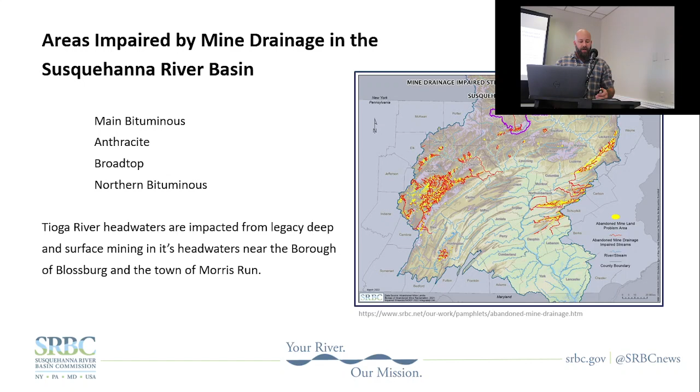It's tough, I gotta push over on this one, down on this one, that's confusing.

So coal was first discovered in Blossburg in 1792 and first mined in 1806. At the peak of production in 1880, Tioga was producing over 1 million tons of coal a year. Coal was mined in Blossburg and Morris Run until the mid-1980s.

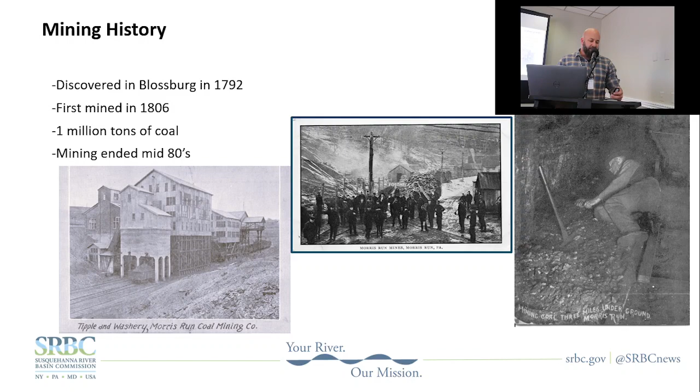So here's the problem. You have 6 discharges that are the main impact of the Tioga River. Those discharges, you have a discharge on Bear Creek, discharge on Coal Creek, 3 discharges on Morris Run, and a discharge on Fallbrook. All these discharges enter the Tioga River within 5 miles of each other.

They pack such a punch that downstream 20 miles, the Tioga River is impacted, is listed as impaired by AMD. That goes all the way up to the Tioga Reservoir, and that impairment would continue for a longer reach, but it's mitigated by the Hammond Reservoir, which we'll talk about later.

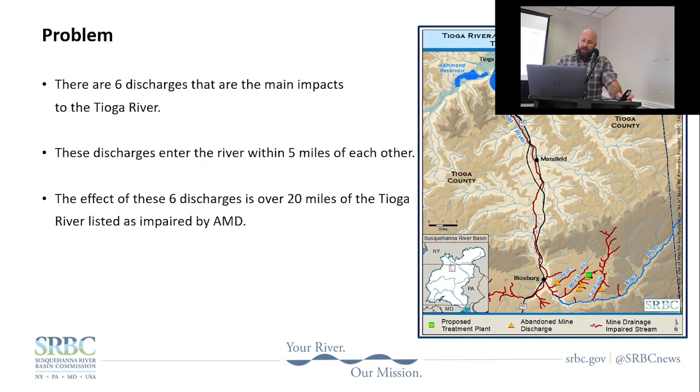So getting into the problems. First one is located on Coal Creek. The discharge is named DCC-05. All the water that you can see in that picture is out of the mine. Kind of looks pretty to look at, but it's awful.

My old partner described, she'd say, that's a lot of shit water. Now, my boss asked me not to swear, so I just said this is pretty nasty water. But it's... I heard you. And I never said shit. I never said shit. Yeah, see, Tom never said shit.

I didn't either. So you're looking at an average flow of 2.4 million gallons a day of water with the pH in the high 2s. It's really nasty stuff. You're talking about 900 tons a year of acidity, 100 tons a year of iron, and 100 tons a year of aluminum.

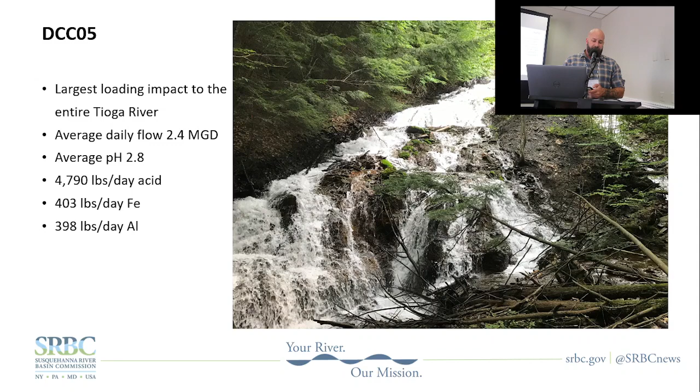DCC-05 is a free draining mine. Means there's no mine pool behind it. You can manually manipulate to allow for the ease of collection and then further on treatment. Highest flows that have been measured out of DCC-05, by the way, it gets up to 11 million gallons a day.

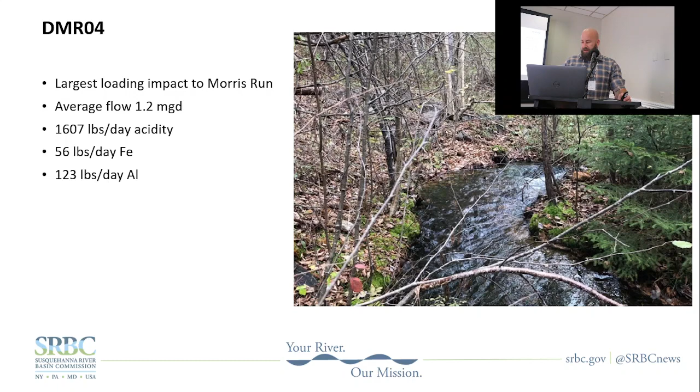Moving on through the watershed, we have DMR-04. The entryway of DMR-04 was reclaimed over, so it now emerges as an artesian discharge. DMR-04 is the largest impact on Morris Run. You can see the loadings up on the screen there. Also on Morris Run, you have DMR-03. This is the second largest impact to Morris Run.

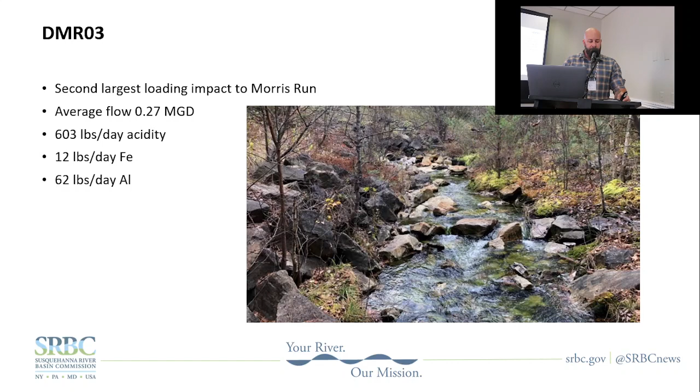All the discharges on Morris Run, real similar water quality. pH in the low to mid 3s, conductivity averages 1100 to 1600. Just like DCC-05, all the discharges on Morris Run are free draining. So again, there's no mine pool behind them to play with. Last one on Morris Run, third largest impact is DMR-01. This is the collapsed entryway right there. And this again has an artesian flow.

DFB-99 is a discharge that impacts the tributary of Fallbrook. It's currently partially treated by a passive treatment system.

Shit, sorry, I didn't say shit.

This is the overhead. There's 3 treatment cells and 2 settling ponds. Due to equipment failure at the collection point, the system now receives more water than it was meant to handle. It was originally only meant to handle 800 gallons a minute. It now receives the brunt of the discharge, and it's more than the system can effectively treat.

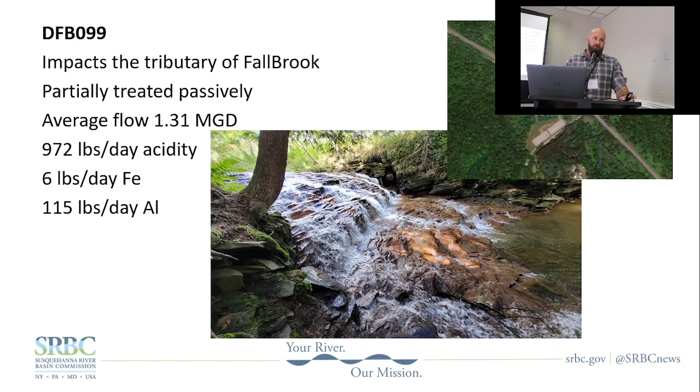So what Tom's going to talk to you about is we're going to take all these discharges and pipe them to a central active treatment plant. This is a look at what the average influent into the plant is going to be. On average, it'll treat a little over 5 million gallons a day.

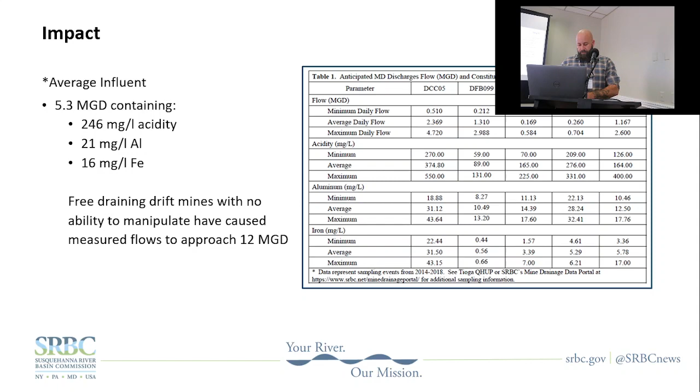Just a little quick story. I always tell a story that others I present with, some of you may know Dr. William Kimmel. That was my graduate professor in California. And Dr. Kimmel always said you at least swore once in every presentation because it keeps everyone awake. And I think we swore about 5 or 6 times already, so we're well ahead of the ballgame.

Thanks, King, by the way, and we're gonna talk about some of the design solutions. I'm gonna preface this talk by reminding everyone that I am a biologist by trade, so I'm gonna talk design work as a biologist, so we'll see how this goes. Just give you a timeline, where we were, where we are now, where we're gonna be in the near future. This project was funded to SRBC in 2021. I do believe Kleinfelder won the proposal in the first quarter of 22.

As you can see, we didn't have a conceptual done until October of 2022, and that's because there were a lot of questions that needed to be answered in terms of if there were mine pools that we can manipulate there. So a lot of borehole happenings in that summer of 2022, helped along by BAMR and Artie Crossman. And what we found out, and what I'm gonna talk about, is there's really no mine pools there to help us. So we have to, as King said, deal with the flow as it's given to us.

Preliminary design, 30%, was completed December 2022. We just came out of the pre-final design, 60%. So we just opened up, getting to the 90% design. We estimate final design first quarter of 2024. And then second quarter 2024, hopefully getting this out on the street and construction bid.

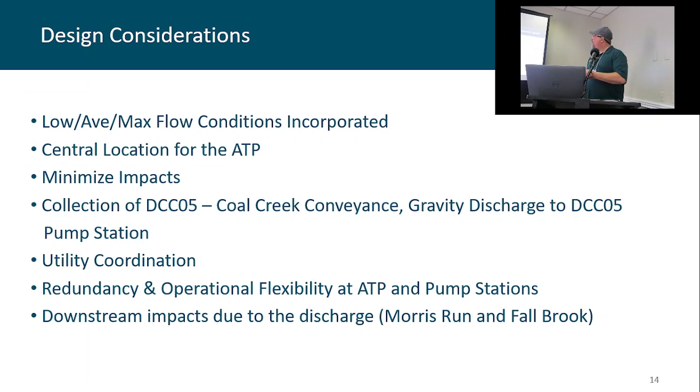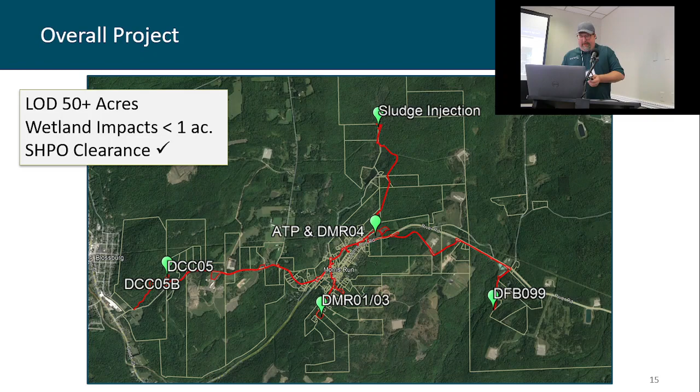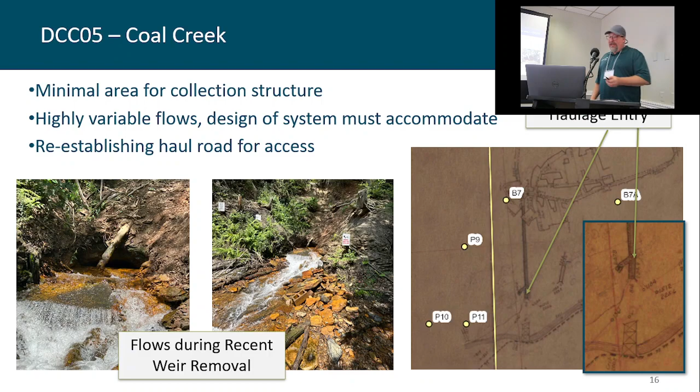So Coal Creek 05, like I said, it's kind of like the challenge within the challenge. There's a minimal area for collection structure. As I mentioned, highly variable flows, 300 to 4,000. The idea here is to reestablish, there's a haul road that you can see. And if that was the easiest way for them to get the miners to there, it's gonna be the easiest way for us to get there to capture and convey that water. But I have some imaging here that's gonna show you how tight it is down there and how steep it is down there. But it's a true challenge to capture this discharge.

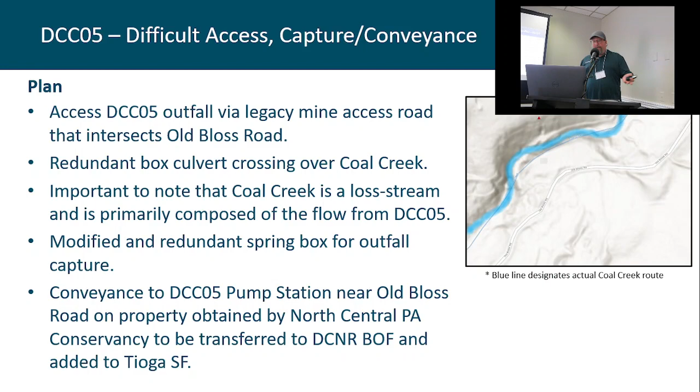The pumping station is gonna be right down there on Old Bloss Road. So that's the idea. But you can see how tight, how steep. It's just a true challenge. And I think it's always been the problem in Tioga River that kept this project from moving forward. But now obviously with all the IIJA money, this is now feasible.

So how are we gonna capture Coal Creek 5? Redundancy. So right here, we're gonna shove two 24-inch HDPE perforated pipes in parallel within the mine. So there's your redundancy there. And then we're gonna have redundancy over the top of that. And we're gonna put that into a spring box. So to me, we have like double redundancy there because you have to be careful with this discharge. If you don't treat it 24/7, 365, you can lose all your gains on the Tioga River. You can treat Fall Brook and Morris Run discharges, but if you left Coal Creek alone, the Tioga River would still be destroyed. So it's real important.

Culvert crossing, obviously we gotta get over there. So two 4x6 culverts here. And there's your pipe that's gonna bring the discharge from the outfall out to Old Bloss Road to the pump station.

So, pump station, pretty large. When you have to pump upwards of 4,000 gallons a minute, your pump station is gonna be quite large. Once again, fully redundant system. You can't stop pushing water. You can't stop pushing Coal Creek to the treatment system. You can't stop, because if you do, then you're gonna lose Tioga River.

So we have remote operation. It allows for 24/7, 365 operation. Each pump has its own inline backup. So for instance, if a pump goes down, the other pumps are already there. You could turn them on, fix what you have to fix in your normal side, and be on with it. Because another thing you gotta realize is that sometimes when something breaks, you gotta wait for a part. So we can't have that happen there, so everything is fully redundant.

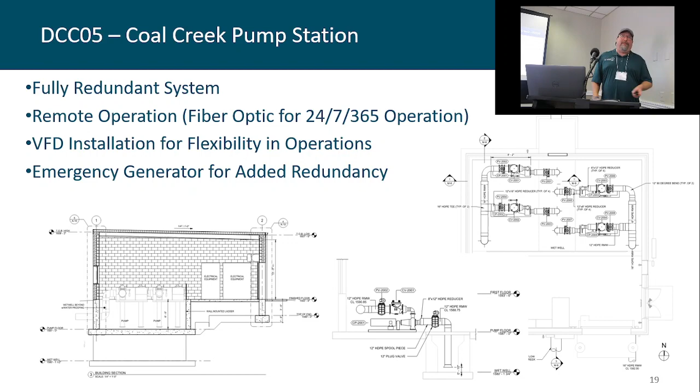And then, like I said, it's gonna run by electricity, but what if you don't have electricity? So we do have a fuel backup there that will be switched on when you do have that ice storm or tropical storm Lee that comes up through.

And then as you're going through a project, you always have other issues that arise that you're not expecting, and one of them occurred very early on. This is the KLJ property right here, and it came up for sale right as we were getting into conceptual design. And worst case scenario there would be someone purchasing that property and then keeping us out. And if that was the case, it could have just ended the entire thing.

So we got kind of creative there, and SRBC was great. They gave a $500,000 grant to the North Central PA Conservancy to purchase that property. And that property allows us access to DCC-05, because right there would be a pump station. And then what's great about this is after the construction's over, Bureau of Forestry is interested in acquiring that property from North Central Pennsylvania Conservancy and adding it to the Tioga State Forest holdings. So a lot of amenities on the site. So to me, we took a problem and created an opportunity out of it.

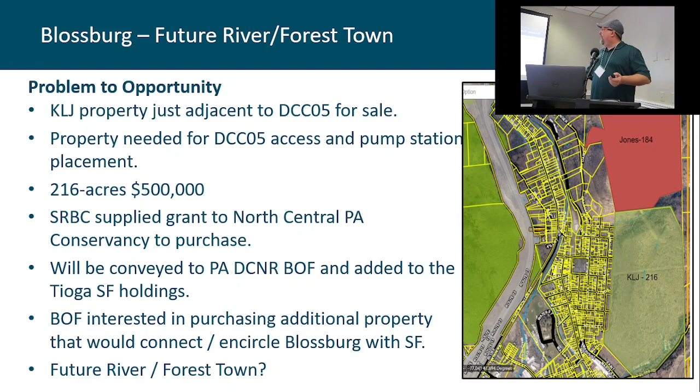If you're looking for cheap property in Blossburg, buy it now. Because if you look at it, you're gonna have a restored river through Blossburg. The Bureau of Forestry is also looking at this property here. It will be completely surrounded by Tioga State Forest. So in my mind, it's a future river town, forest town.

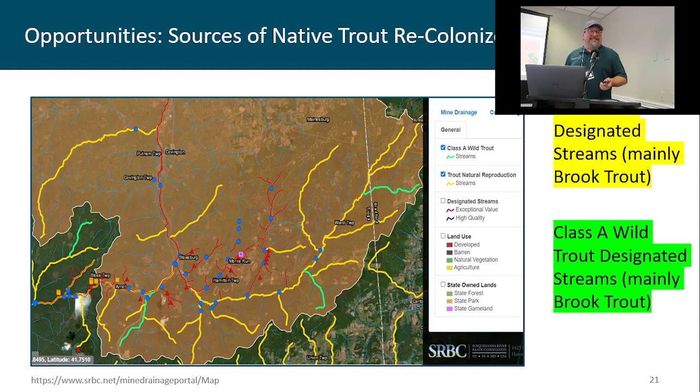Other opportunities: I'd love to be a grad student looking for a thesis. This is a perfect thesis project. The yellow lines are your wild trout designated streams. Green are your Class A. So as soon as you turn the switch on in this system, those fish should have access to come right back into the river. How quickly does that occur? At what rate? Those are things that could be studied.

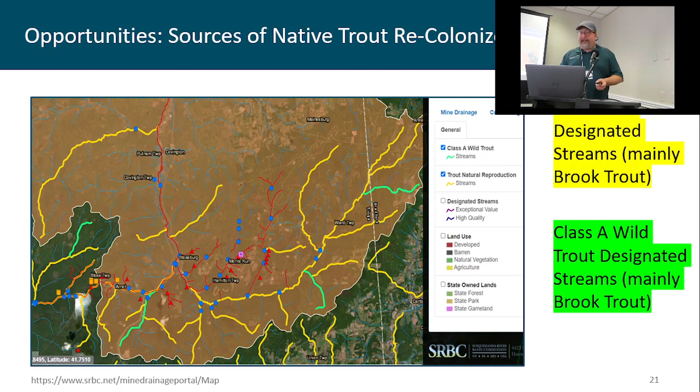So DFB 099, that's kind of the other challenge within the challenging project. As King mentioned, there's an existing passive treatment system there that's overloaded. Their capture structure has become compromised with the acidity and is putting more water into the system than what it was designed to treat. So it's less effective, and the operation and maintenance has increased there as well.

So we want to fix this problem because we look at this as a way to be redundant with the water capture at Fallbrook. So we're going to capture the water before it gets to the passive system, give the passive system what it was designed to take, and then ship everything else off to a pump station that will be located about right in there. And then the rest of it will go up to the active treatment plant.

The other thing I want to touch on here is thinking about where best to put treated effluent. If we're sending a pipeline up to the treatment plant with bad water, why not just put another pipe in the ditch and bring good water back? Because that lower 2 miles of Fallbrook is some of the prettiest water you've ever seen. And we could bring back like 2 miles of it just by bringing back treated water. So one of the things we've thought about there was how best to divvy up that water. So that's one of the things we're gonna do there.

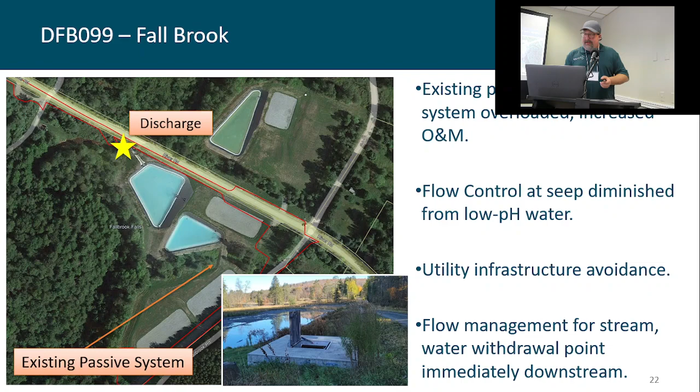Other complications, so the passive system redundancy: what's gonna happen is 0 to 300 gallons per minute will go to the passive treatment system essentially. Everything between 300 and about 2,000 is gonna be pushed by the pump station up to the plant. Anything over 2,000, this discharge has on occasion got over 2,000. It's very rare, but it does happen.

Remember, I said 800 gallons a minute is the design capacity of that treatment system. We have a 500 gallon a minute buffer there. So anything over 2,000 will allow us to get up to essentially that 800 gallon buffer that we have there. Removal of the flow control structure that isn't working.

The other problem here is a lot of infrastructure around this area, particularly from the gas industry. So to get around that, or I should say to get underneath it, we're gonna horizontally directionally drill underneath Fallbrook and underneath all the infrastructure just to get away from that, to minimize that risk.

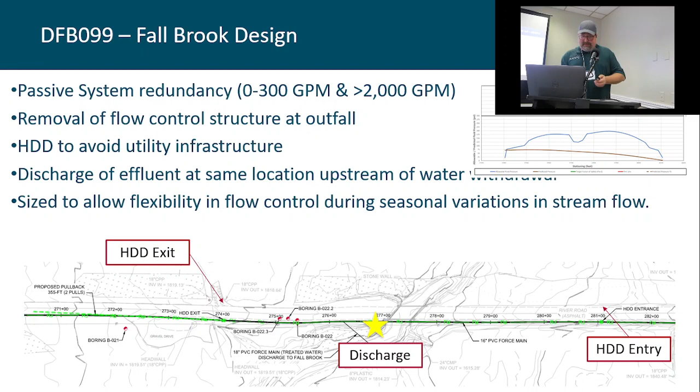So we're at the plant now, and remember, I'm a biologist, I'm gonna do my best here. Who was on the Black Lake tour yesterday? A lot of you? This is a very similar setup here. You got a dual train, hydrated lime type plant. The only real big difference is that they have carbon in their water over at Black Lake that they can blow off with aeration and improve it. We don't. These things are free draining. They're full of oxygen. There's no need for that because you're not going to push the pH anywhere. So that's kind of the only real difference.

This is also bigger. But everything comes into a collection tank here. And then, like I said, dual system. You can cut this thing in half. This side treats upwards of 7.5 million gallons per day. This side can do the same, 7.5. Why 15? Historical record shows the combined flow of those discharges to be about 12. But you don't want to design it for 12. You want to give yourself a little bit of safety. So we thought 15 would be a good number that allows for that operational flexibility. But it's very similar to that.

You have reaction tanks where your hydrated lime's going to go. These are reaction tanks, these are your floc tanks. And then right here, that might be the only other difference with Black Lake. We're going to put all the treated water into a pump station, and that's going to allow us to pump that clean water back to Fallbrook and bring that lower 2 miles back. The rest of it going to Morris Run and upstream is going to be restored as well. But that allows us to bring that back.

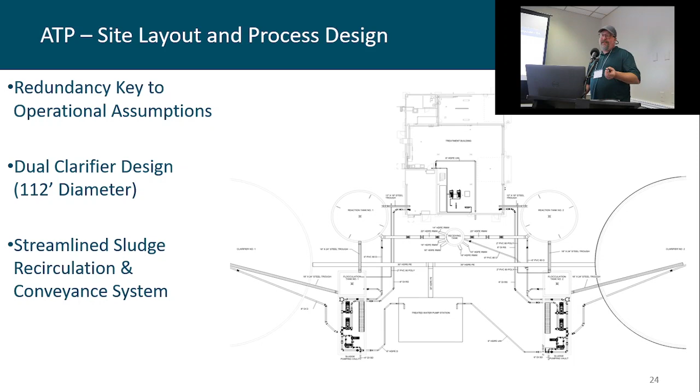If you've never gone and seen the Fallbrook Falls, get yourself up there. It's really pretty.

So just key points to end with. Energy and equipment redundancy at all the pump stations. As stated, you have to treat this stuff 24/7, 365, so that's paramount. The added capture and conveyance redundancy at DCC 05, I feel like we have double redundancy there just because we've got to be careful with that discharge. The ability to bypass extreme flows at 5 and 099, those are our two biggest flows, so we have the availability to even bypass water there if you have that really weird, drastic hurricane event.

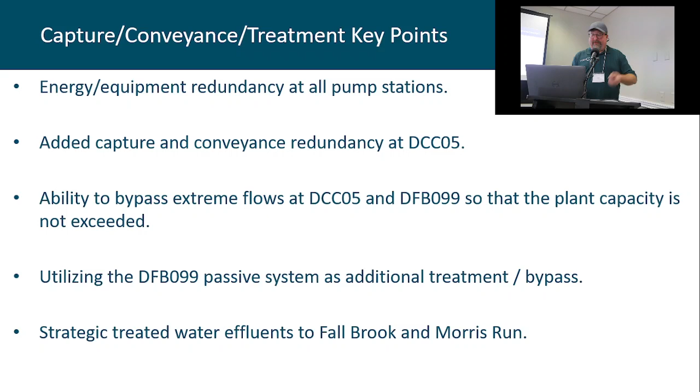Utilizing DFB 099 as an additional treatment and bypass. Think about those things. If you're looking at a similar situation, maybe giving less water to a passive treatment system, making it function better, may be an alternative and allow you to manage your water going to your plant a little better. Strategically treat water effluents to Fallbrook and Morris Run. Think about where you're going to put your treated effluent. It's advantageous to take it back to Fallbrook. If you're putting a ditch there, take treated water back.

Dual clarifiers, allowing for the average to be treated on one side. Let's say that the influent is 5 mgd. You could treat that all on one side, do your operation and maintenance on the other side, and when you're done, you could flip it back and forth and do operation and maintenance on the first side. Really important there to accommodate the high flow events. We can't control this water, so we got to treat what's coming.

Open troughs where possible in the ATP to improve access and ease of maintenance. That's something we got from the Rosebud plant. If you don't need a line that can clog, don't have it. Open troughs are the way to go in some regards.

We have the ability to add a soda ash silo if needed. We did some modeling there, and because we're not treating the Bear Creek discharge, we have to hit some alkalinity concentration goal to adequately attenuate that discharge. If we can't do that, we have the ability to bring in soda ash to kick up that alkalinity even more, because you can only go so far with hydrated lime. You would have to use soda ash as an alternative.

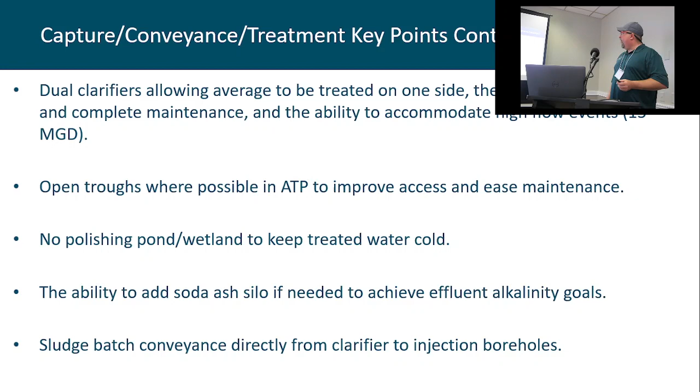And then the sludge batch conveyance directly from the clarifier to the injection wells. That's something that you'll always see on some of these plants. So I'm gonna hand it back over to King. He's gonna talk about just a couple more slides there, the low flow augmentation.

So, one of the main goals of the commission is to make sure that there's always water in the river for people, businesses, the aquatic ecosystem. One of the ways we do that is by looking for low flow mitigation water. This is the Tioga Reservoir, this is the Hammond Reservoir. The Tioga River is impacted by AMD all the way up to the Tioga Reservoir. This is an Army Corps flood control dam. They keep the Hammond side 5 feet higher for the purpose of diluting the degraded water quality of the Tioga River on this side.

Once the plant's into effect, that water is no longer needed. So you can hold it for periods of drought and use it as low flow augmentation. 5 feet of water may not sound like a lot, but 5 feet over that whole Hammond Reservoir is 1 billion gallons of water that can be used as drought mitigation.

This is a dashboard that the commission made about this project. It's a pretty slick little map. If you're interested in more information, you can find it at srbc.gov. Click on portals, go to story maps and dashboards. You'll find this project and other projects that the commission works on.

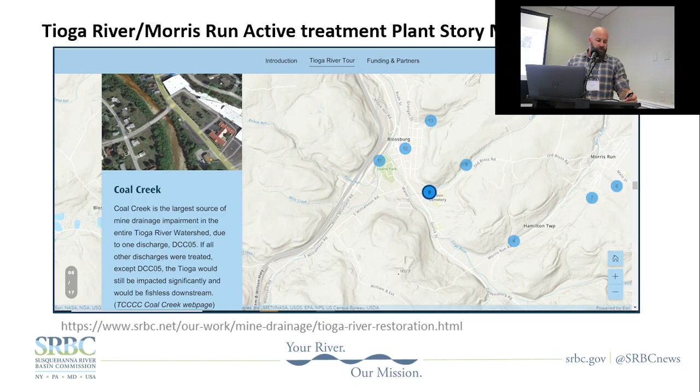If you're gonna use open troughs, presumably a lot of these pipes are gonna go through woods and forests and stuff like that. How do you keep the leaves from clogging it up? So the open troughs are just at the plant. Oh, I'm sorry. Yeah, they're just within the plant. Get away from water lines and things within the plant that can clog up. We went to like every plant that's been built in the last 10 years and wrote down the negatives and positives. A lot of times the negative was, man, our lines clog. And then we go to Rosebud and they have open troughs and I'm like, there's the solution.

With that thought in mind, your conveyance pipes are gonna be pipes? Yes. So I'm just curious, how are you gonna maintain the runoffs, keep them from clogging? What's the design? Yeah, so you're dealing with real acidic water, so that shouldn't be the real issue. They're already fully aerated as well. So I don't see that being a problem. A lot of it's forced mains as well, so they're gonna be flowing under pressure.